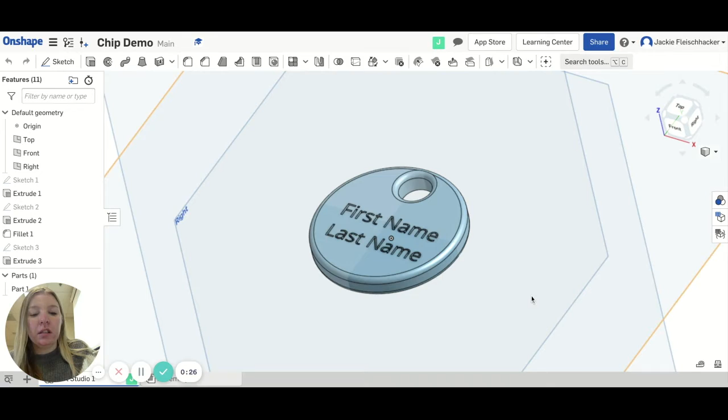So I'm going to go back to the beginning. From your main Onshape page, you're going to click Create a Document. And I'm just going to call it Chip.

All right, so here is our workspace again with our 3 different planes, our X, Y, and Z. You can see them all on the little view cube too that you can rotate around. So we're going to start with creating a sketch.

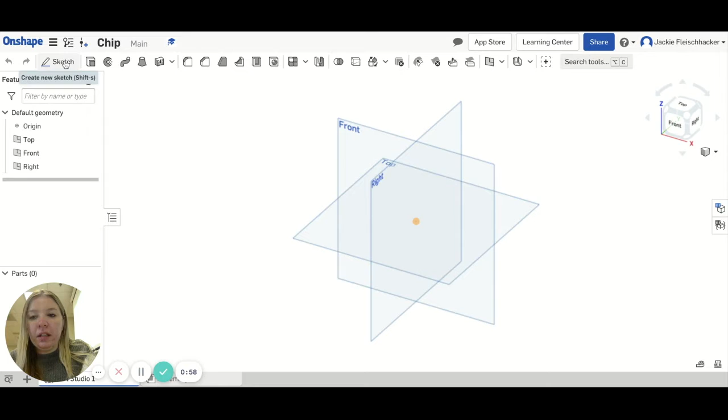So I'm going to click the sketch button, and it says select a sketch plane, and it also has this part over here blue. That means you need to do that to kind of move on and do the next step. So I'm going to click the top plane, making it orange and clicking on it. And now you can see that there's a sketch box that's on that same plane as that top plane.

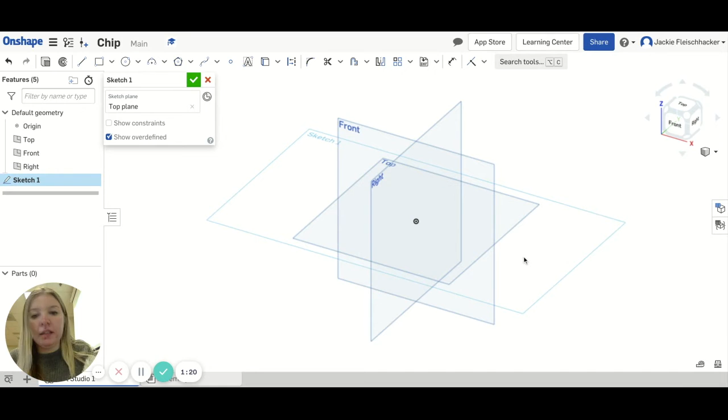I'm just going to rotate on my view cube. I'm going to click top to kind of make it viewing straight on. So I'm going to leave this sketch box open. If I click the green check mark, you exit out of sketch mode and you can't keep sketching, so you want to leave that open. If you do close it, you can just double click on sketch 1 over on the left hand side.

And we're going to draw a circle. So I'm going to grab my center point circle, and I can tell I'm on that tool because it's blue. And I'm going to go right in the center. This is the origin of our workspace, the very center of the world that we're in. So I'm going to click once on there, and then I'm going to move my mouse out and click again.

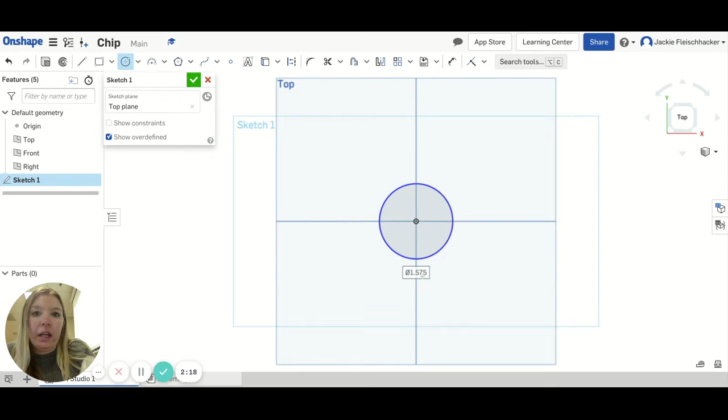So right away, it's always going to ask you the dimensions. If you don't set the dimension now, there is a way to do it later, and I'll show you that too. But that little box there on those numbers means it's asking you what size do you want this to be. I'm going to do 1.5.

Actually, I wonder what our units are in. I want it to be 1.5 inches. So this little document menu button next to the Onshape button, you can go to Workspace Units. And I'm in inch. If yours is in millimeter or centimeter, you can change it. So if mine was in centimeter, it would probably show 3.81 instead. So if you were in a different measurement and you change it to inches.

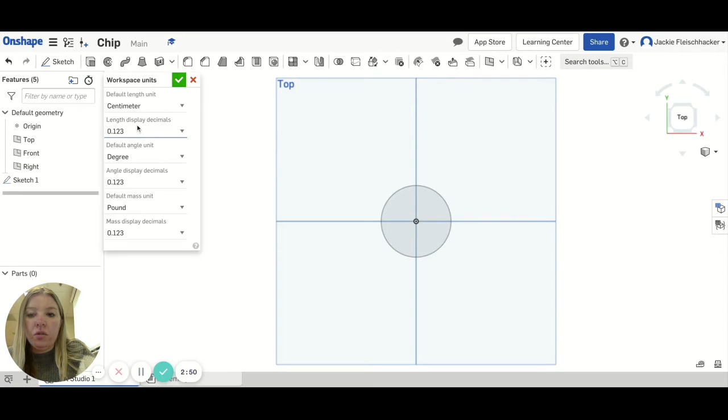I can go back into my sketch, and you might have to double click on that number and change it to be in inches. So from there, you can click the green check mark. We're going to be done with that sketch, done with this 2D shape.

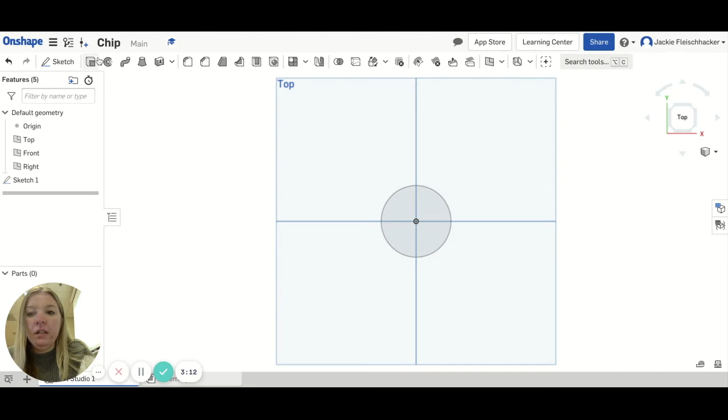We're now going to make it 3D by clicking this extrude button. So extrude is how you make things three-dimensional, you add depth to it. So I'm going to click on it once. And now it says basically what face or sketch do you want to extrude. So I'm going to click on that circle that we drew. And if I rotate, I can see that now it's adding height to it. So instead of 1 inch, we're going to do 0.2.

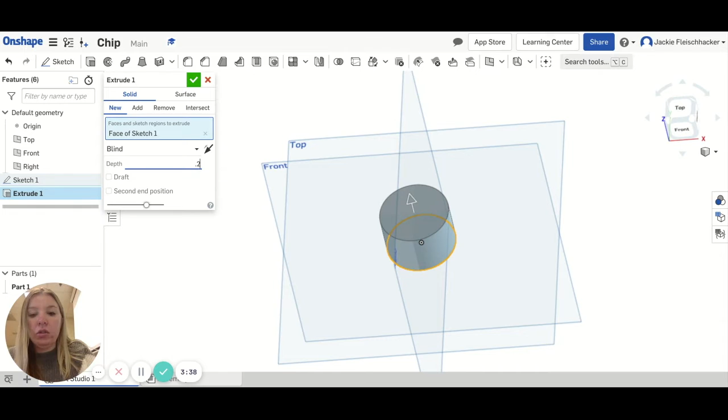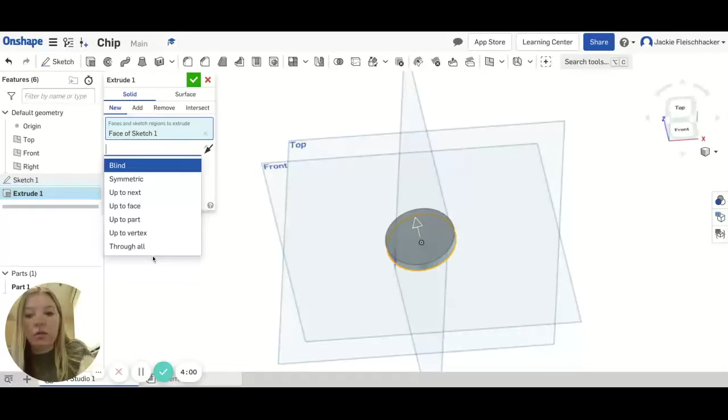If you hit enter or just click off, it'll readjust. We can add surfaces, remove, we'll do a little bit later. Instead of blind, you can do different things too. If you want to remove a hole through everything it's going through, you can do through all. You can change the direction of the extruding, so you can see that arrow flipping. Sometimes, depending on your design and what you're doing, that'll matter. I'll just leave it at that default.

Actually, I'm going to flip it so it's going away. That'll make another step a little bit easier, but if you don't, that's okay too. And I'm going to click the green check mark. So there is that beginning of our little chip.

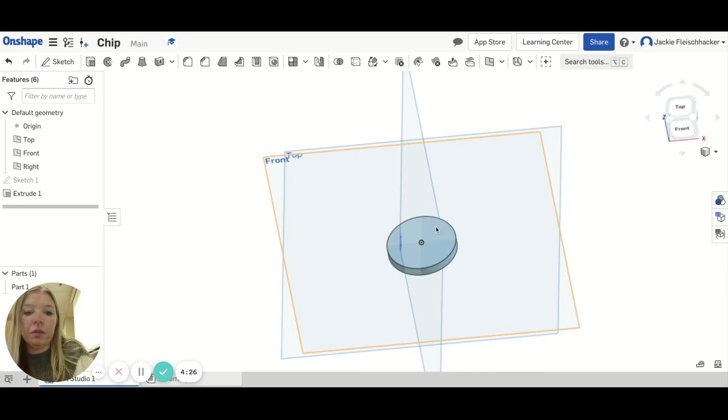So we're going to add a little hole in it to put like on a keychain. So I'm going to do a new sketch. I'm going to click sketch. Instead of choosing like top, front, or right plane, I can actually choose that surface of my circle that I drew. So it's yellow, I'm going to click on that. And now I can see that sketch too.

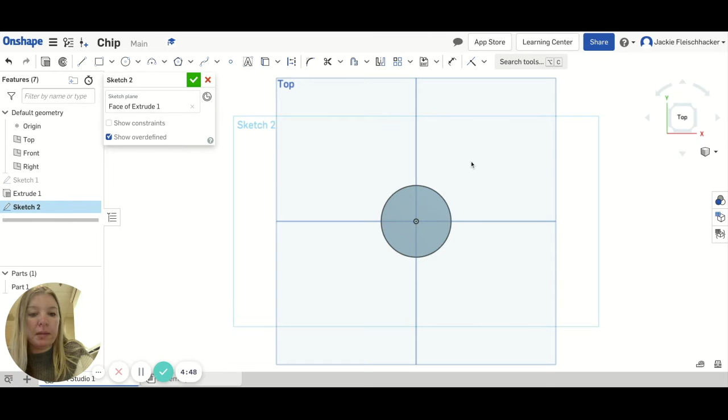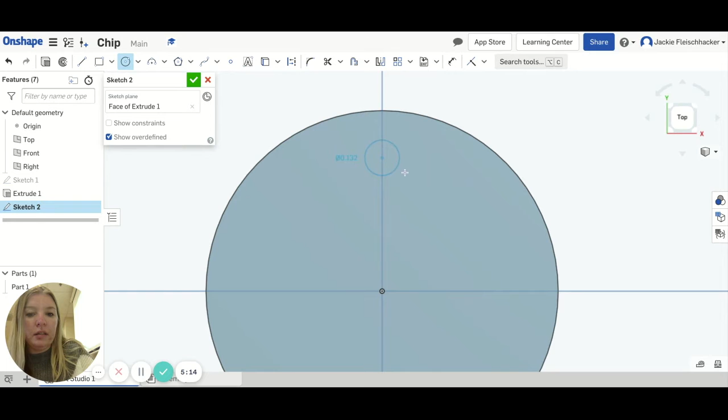I'm just going to rotate to view it from the top again. And I'm going to do another center point circle. I'm going to zoom in here. So I want it directly above that middle part of the origin. You can see if I start where that center origin marker is and move my mouse up, there's a really faint yellow dotted line. So I'm just going to kind of go up a little ways and then click once to place the center of my circle, and then click again to place the outside. So we're gonna make this...

0.325. And to set that dimension, I didn't click off of it, I didn't click the box. It was already selected, so all I had to do was type in the dimension number. And there is that circle.

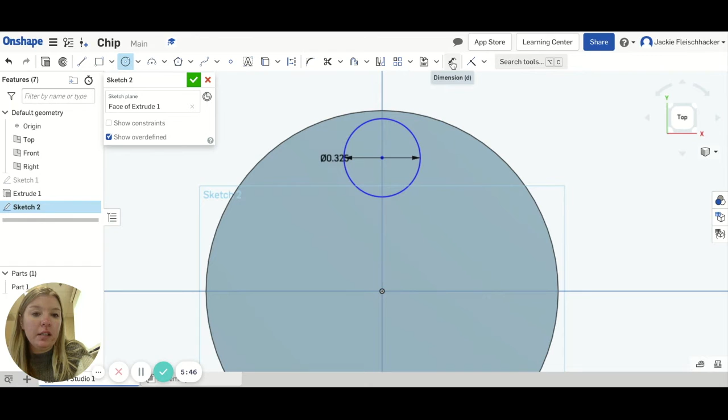So depending on where you placed it, it might be really close to the edge or off of the edge. So we want to set the dimension from how far the center of our circle is to the center of our full chip. This button right here is the dimension tool, so I can click on it. Now it's blue, so I know that's the tool I'm on. I'm going to click on the center of that circle we just drew and the center of our origin and make this 0.5. And it gives us a good space from that edge.

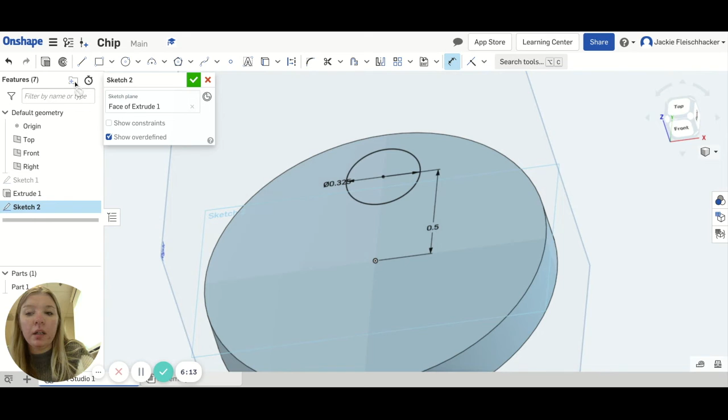So if I rotate here, next we want to remove this hole through our whole chip. So instead of closing the green check mark, I can actually just click the extrude button right now, and then it knows that that sketch that I did is what I want to work with. So you don't have to click it later. Instead of adding, I'm going to remove.

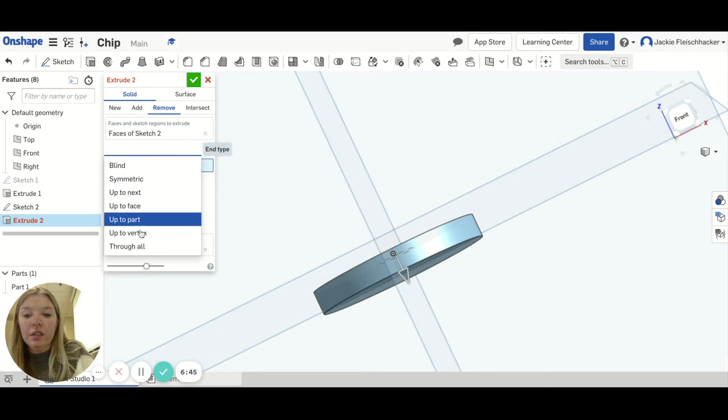Right now it's removing a full inch, which things don't go that far anyways. So you could do an inch, I know it's 0.2 in depth. You could just do up to part, I think that might go all the way through depending on what you're doing, or through all, that'll for sure cut all the way through. So there are different settings, and you can kind of play with to see what it does on yours. But I'll just do through all. So now I have a hole in there.

So next we're going to round our edges just to make it a little bit more finished looking and crisp. So we're going to do something called a fillet, which is rounding the edges over. Chamfers are kind of similar, but it puts it at an angle. You can kind of see the difference in those two icons. So I'm going to do a fillet.

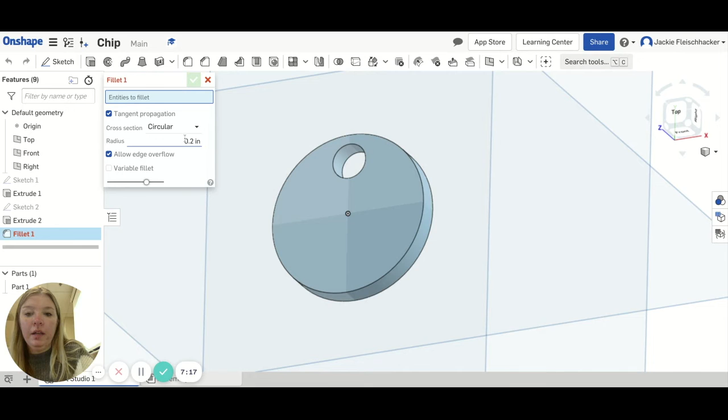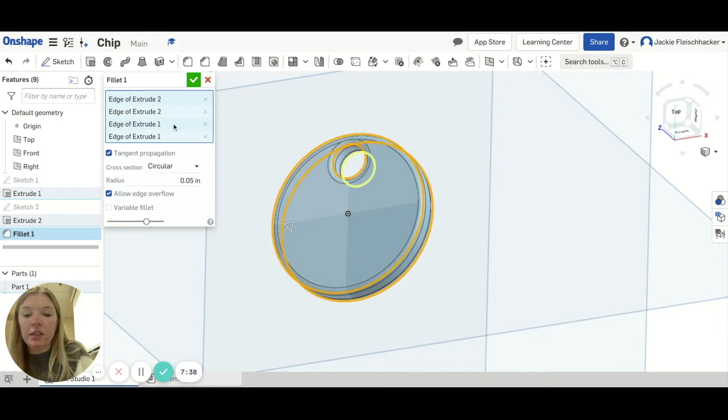I'm going to set the radius to 0.05 and click on the edges here: this edge on the little circle part, the bottom of the outside circle. You can see they're all listing here, so if you realize you don't want that edge, you can unclick it or hit the X to remove it. But we want all four of these surfaces to be rounded. Click the green check mark to accept it, and now we have a little rounded chip.

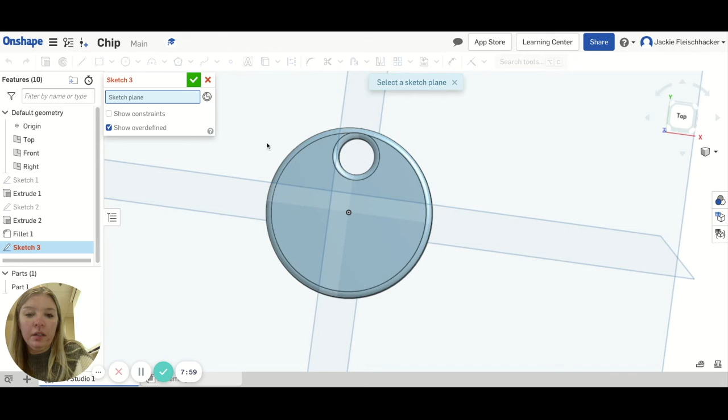The last thing we're going to do is add your name on here. So we're going to do another sketch right on the face again. I'll click top so I'm nice and square, zoom in, and there is this text tool.

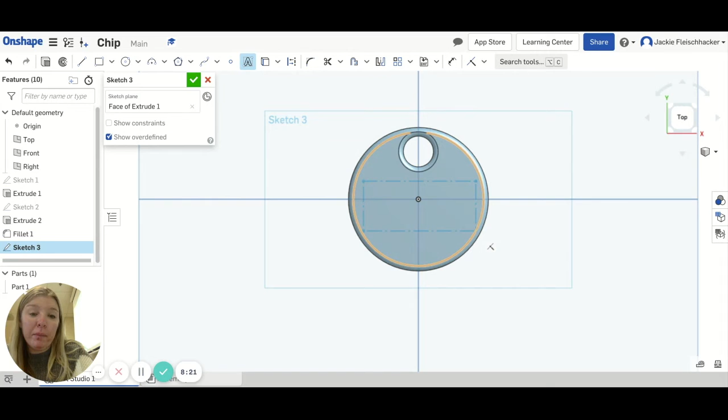I'm going to click that and drag out a little box. When doing this, I'm not going to let it snap to an edge, because then it gets stuck and dimensioned to that point and you can't change it. So I'm going to make sure nothing gets highlighted yellow.

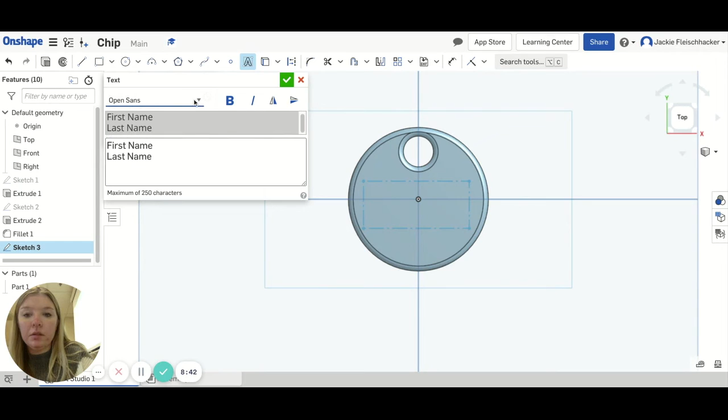Click, and you're just going to type your first name and last name. You can do it on two separate lines or one line, depending on how long your name is—Fleischhacker, for example, would definitely need its own line. I'm going to click the check mark. You can play with the font or bold if you want, but I'm going to click the green check mark.

Your name is probably going to be huge, so we need to dimension it a bit—this will be different for everyone since names vary. I'll click the dimension tool and dimension the height of my line by clicking this little line and dragging out to place the measurement. I'm going to try 0.2—let's see how big that makes it. That made it a lot smaller, so now I need to shift it to get it onto my actual chip.

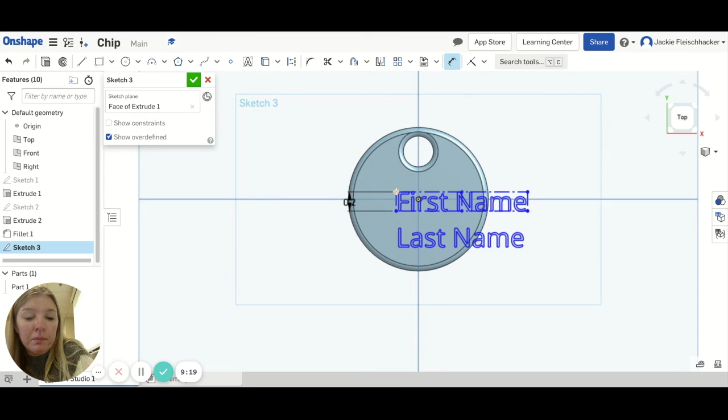I can also dimension from a point, or maybe the center—so the center point to the center of my chip, that origin—and I can make that 0 because I want it perfectly centered. I can see my name is still a little big, and maybe I need to move it up a little higher.

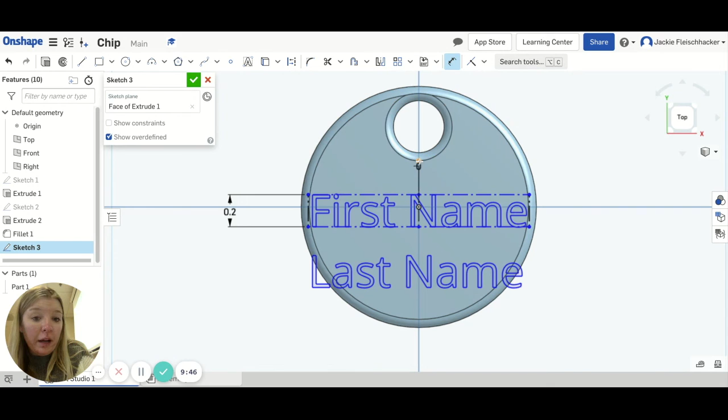Another thing I could dimension is the center of my name to the bottom of my circle—let's try 0.15 to move it up a bit. I think I need to make my first dimension, the 0.2, a little smaller—0.15. There we go, that looks a lot better. So just try to get it generally centered on the chip, not hanging off the edge.

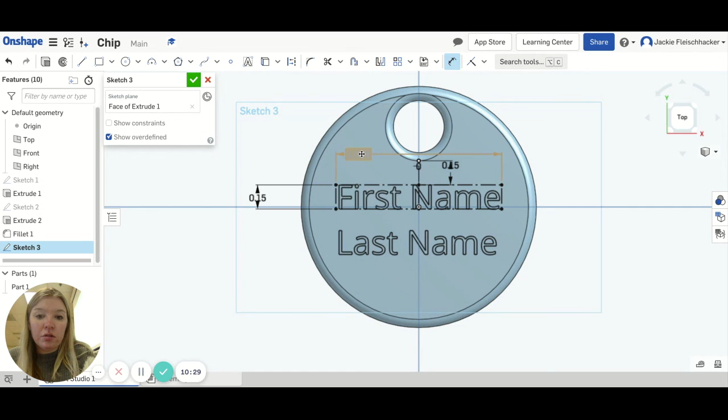You'll have to play with those dimensions a bit—you can really dimension all kinds of things. Even this line here, I could dimension from the top of my chip. You can do all kinds of stuff. If you ever mess up and don't need a dimension, Control Z or Command Z on a Mac is how you undo it.

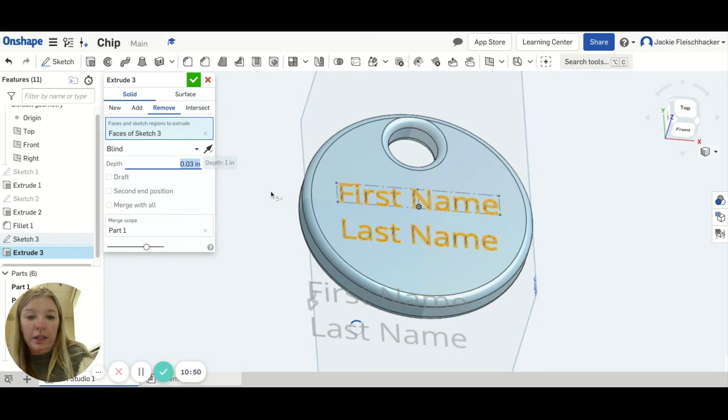So I'm going to extrude this now—click Extrude. Right now it's popping out a whole inch, so I'm going to remove that and have it cut in just a tiny bit, 0.03. When I hit enter, I can see it's only cutting in—if I rotate just a tiny bit it's even kind of hard to see, but I'll click the green check mark to accept it.

And there is my little chip that would have your name in it. So you're going to turn in just a picture of this chip to the assignment in Schoology.